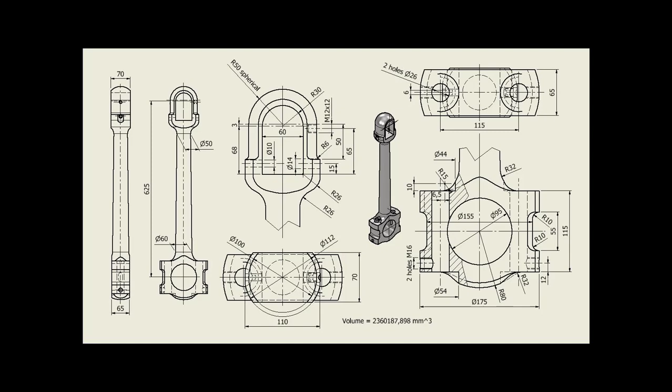Hi my friends, today we study and model this object, which is a crank. The distance between the two ends, the centers of the two ends, is 625 millimeters - this is why I called it crank 625. The drawing is here, and as you can see, the distance is 625.

There are some problems, but I want you to know that the source for this model is another drawing of Timoteo Carreras Soto, an engineer I told you about in the past - see my tutorials 182 and so on. This is our part with some other components here, and this is its drawing, the bottom and the top end.

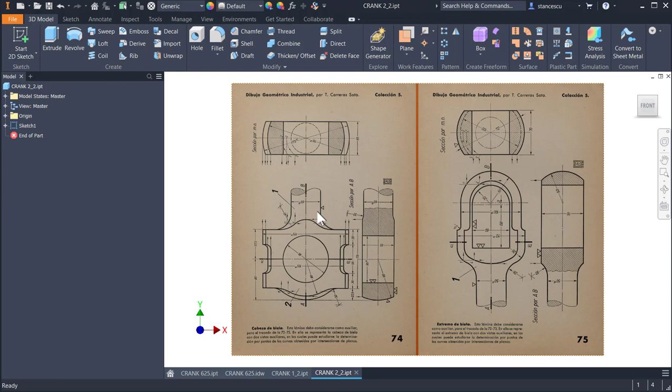There are some small errors here. As you can see, this is radius 80 and this is also radius 80, but this is corresponding with this arc, not with this one. So we admit that in 1955, when this engineer started with his drawings, it was another mentality, and we have to respect them.

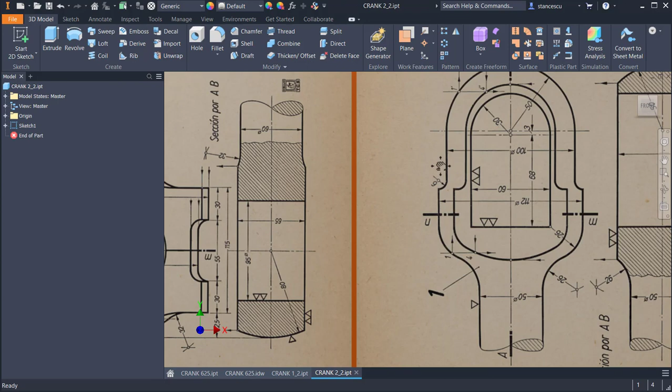There are also some other small mistakes. I converted this to the actual standards, so this is why I made this drawing, which has all it needs. You see, radius 80 is outside here, not here.

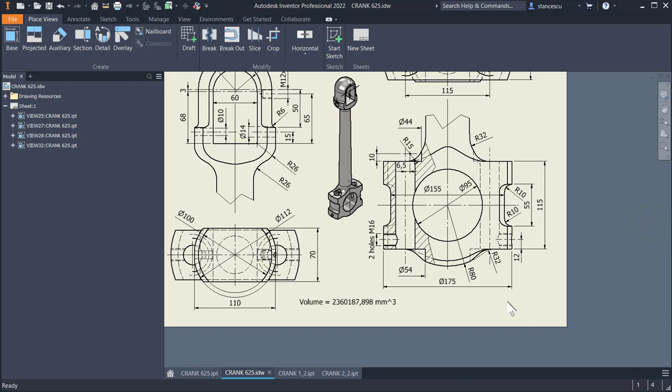Let's use this drawing to create our part. New file, standard millimeters IPT, and we draw a line as a center line from the center down 625, the length of the crank, as you can see.

Then we want to draw this external contour, which is a revolution contour, to create the top end, and we want to create this other part, end by using the proper dimensions.

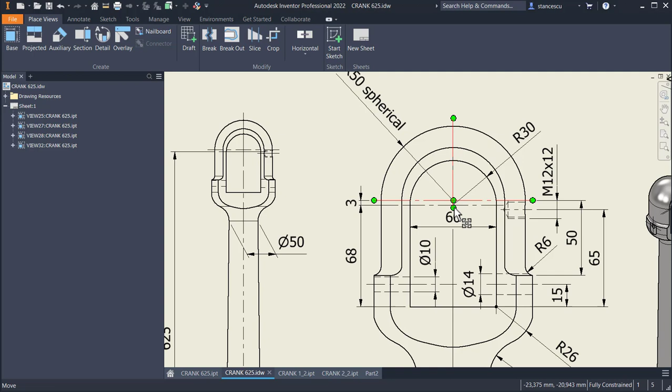You see here radius 50, the distance of 3 millimeters, very important between these 2 points. This is the center from where we measure the 625, the bottom, not up, but the external contour is from 3 millimeters up.

So let's start. New, millimeters, sketch. We apply center line as a default line, and we draw a vertical line from the center point to the bottom of 625 millimeters.

This is the center line of the part. We start with the half of the profile, going with a line, but not center line, to here, and then I keep pressed the left button of the mouse to go here.

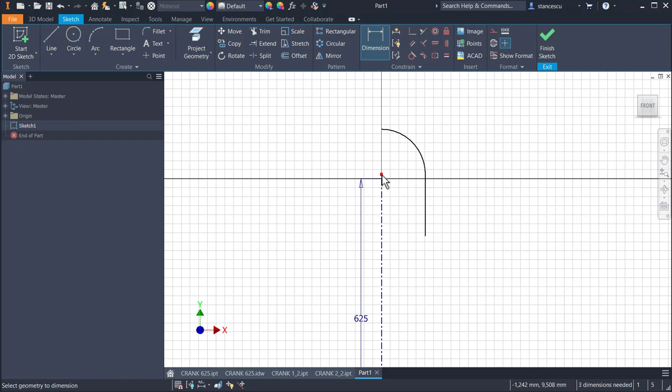Escape, the same vertical between this point and this end, and the same vertical between the center point and the center of the circle. We place here the dimension of 3, as I said, the radius of 50.

And then I move a point somewhere here, and I continue with the tool line to draw an arc. This is the construction, and we go somewhere down, and again 2 tangent arcs by keeping pressed the mouse cursor.

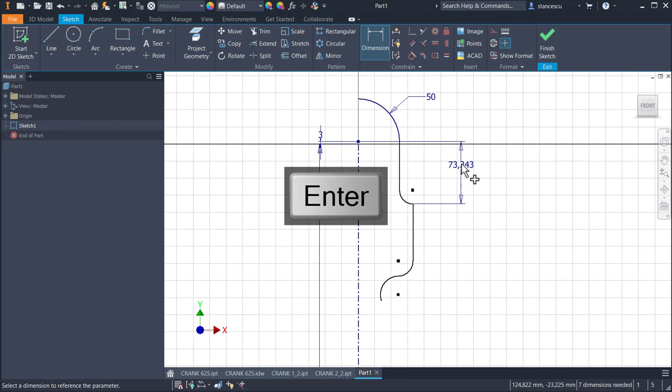Dimensions are 50 from this point to this point, 50. This is 6, a radius of 6, diameter of 112, 112, a radius of 26, and also 26.

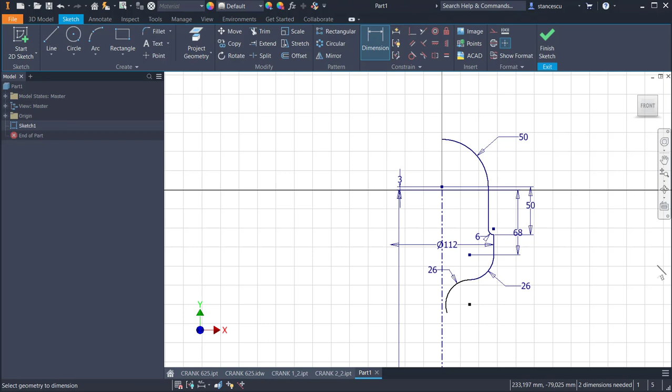Good. This point must be at 68 from the center point. This dimension is 68. Good. Now I go down

to draw the other end, and considering that this is the end of the vertical line of 625, and 115 is the distance between these two. So I start from here, I draw this radius 32, and then I go down with 32 and 80 with the center here at the end of that vertical line.

Let's start with the last thing I said, an arc with a center here and the radius of 80. We place this point on this vertical and we draw line arc. This is the line which is converted to an arc.

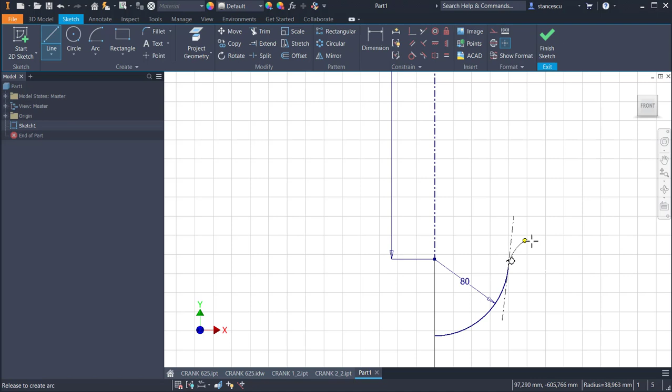We go to the right, up, arc, up, arc, left, and another arc. Escape. These two lines must be collinear. These segments are equal, these arcs are equal.

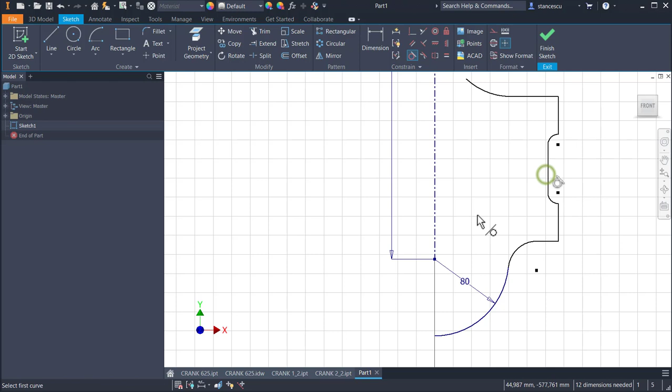I suppose this is not tangent. Yes, it was not tangent. And then I place 55, the distance between these 2 points. 55, 115,

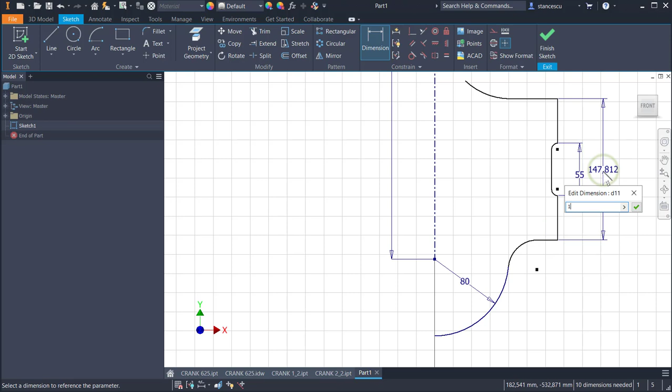15, radius of 32, and also 32 here, and I move this construction, but let me place another dimension here, 10, to keep it

stable. And I move this somewhere here, but this arc must be lower, lower, and since this point must be on the same horizontal with the midpoint here, I draw a line, construction line,

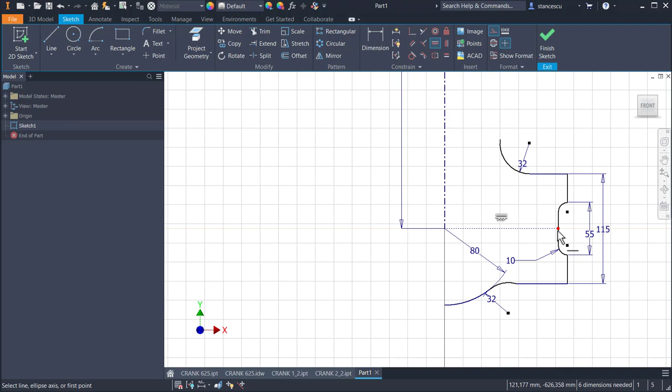between this point and this end, and then I make it horizontal, this line to be horizontal. Why? Because the dimension of 625 is from here. Good. Another important dimension is 60 here,

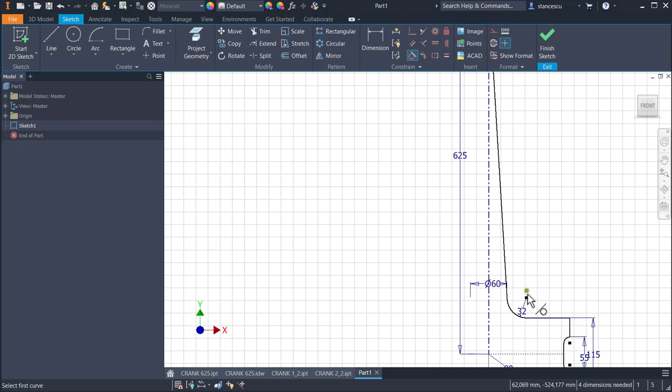and I draw a line between these two ends, not construction. I disable construction, I make this not construction, and I apply tangent between the line and the two arcs. Why? Because I want to place here the dimension of 50. You see? This is

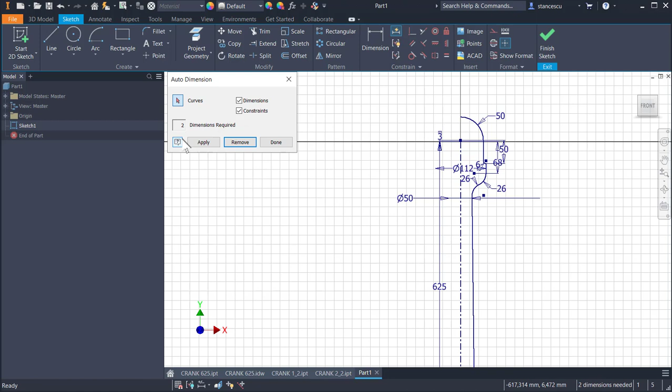roughly the sketch. We need to place other two dimensions. I suppose at least one of them is a tangency, but let's see with auto dimension. Apply. No, they are both dimensions, remove, apply. One is for this point.

Oh, I forgot the two dimensions, this diameter and this diameter. This is why. So this diameter is 175 and this diameter is 155, which really is, but I want to place that dimension now is

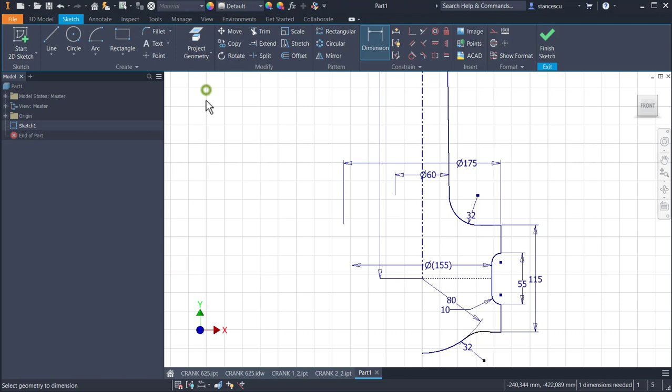accepted by changing the situation of these points. This point, this point, this is on this line, you see? This is in the air, no problem. But this is on this line, since we see the red line when I select this point.

So I click here and I apply delete. Now this point is not on this line. This point is not on this line. So I can convert this informal dimension to a real dimension.

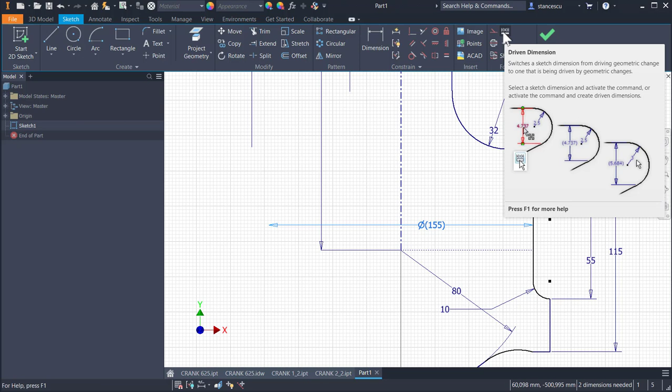How to do this? Anybody knows? Is anybody who knows what to do? If not, I'll show you. I change this setting. You see? This is for driven dimensions and I convert to not driven conversion dimension. And now it is real.

Very useful to know. And this is another dimension missing, but we see it here. Tangency. Tangency between these two. And now it is fully constrained. I try to extend the center line, but I receive an error message because of the dimensions. So I need to draw a new center line.

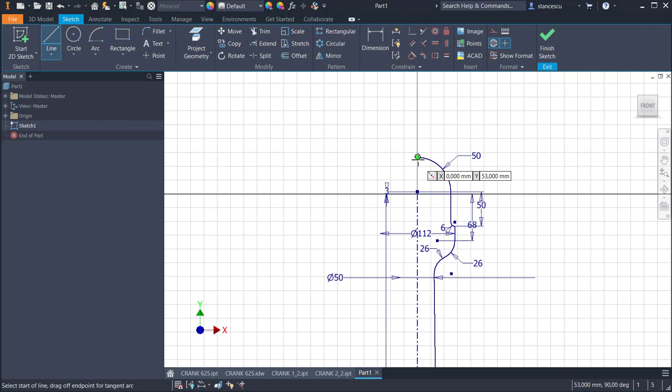I apply center line and I place it here. What happens up? The same thing. Finish sketch. Revolve.

Oh, this is missing. Let me draw another short line with the length of 3 millimeters. Center line, line from here to here. Good. Disable this, finish sketch,

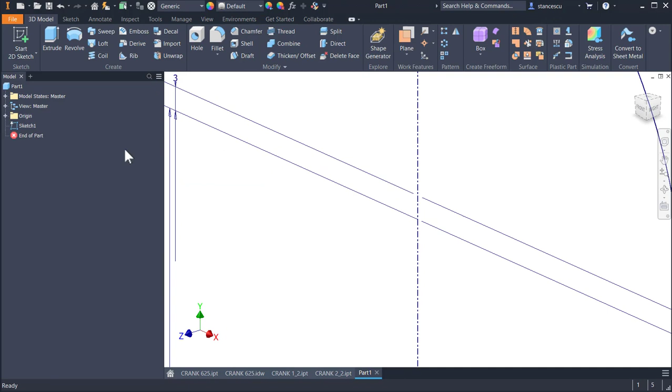and revolve. Now we have the volume by selecting the axis, because there are 1, 2, 3, 4 axes here. I have to select the one I want.

Okay, the material is steel carbon F6, and we have a starting point. Very interesting, my friends, very interesting.

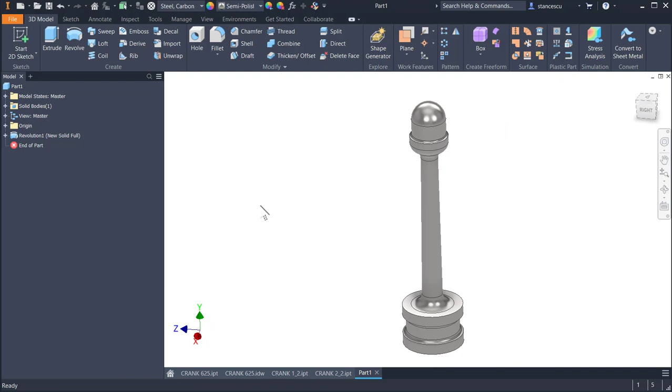Good. Now I want to apply cuts. As you can see here, there are two cuts. This face is one and this face is another one. The difference between them is 5 millimeters.

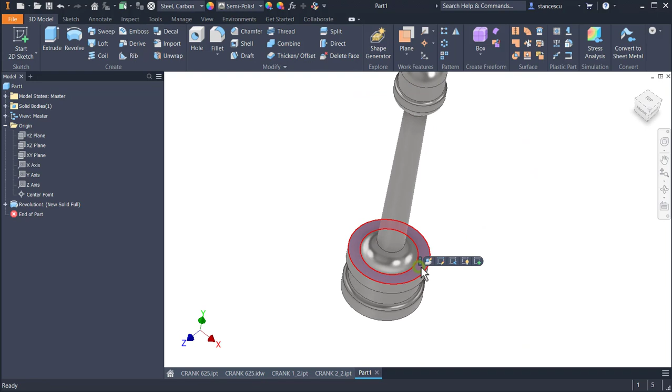So I create a plane, because I cannot use neither this plane, which is placed at the center point, yes, 3 millimeters from this circle down. I cannot use this plane because I have to go up and down. Oh, but this is okay.

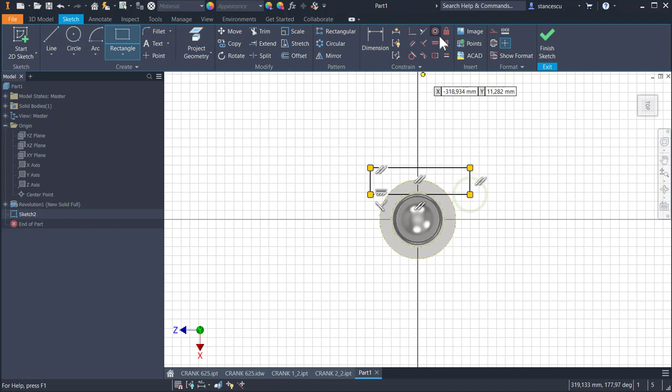Yes, let's create a sketch here. All of these are construction lines, and I draw a rectangle which must be tangent to the same circle on all these sides. Yes.

Now I can mirror. This is the only freedom line remaining. I can create a mirror of this sketch, but I don't like mirroring sketches. I don't like. So F7 to see inside.

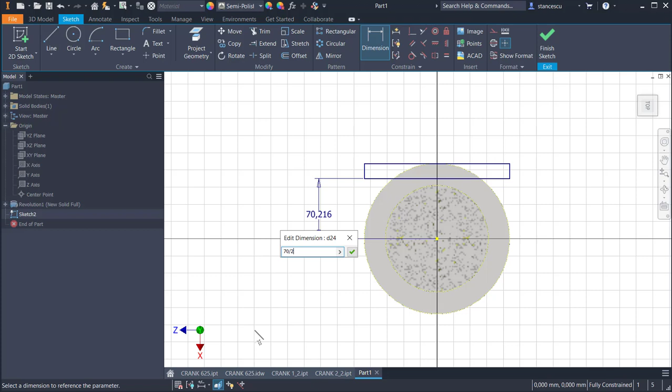I apply the dimension of 70 divided by 2. Divided by 2. Okay, and now we have the profile to apply for cutting all the part from bottom to up.

Extrude, the only closed contour is this one. We select this and through all, but cutting. You see, we have here the feature.

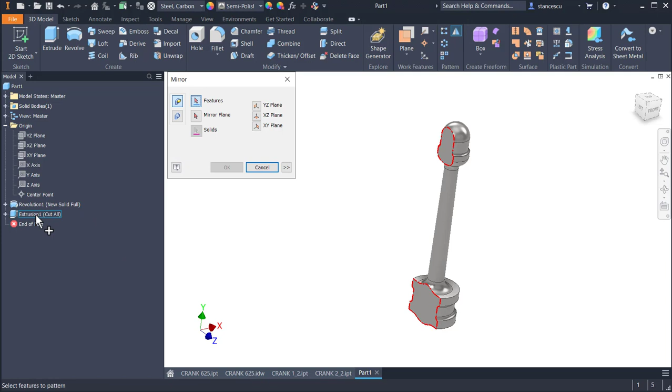Okay, and then we apply mirror of this last feature, extrusion, about the XY, not XY, but YZ plane, and we see again the feature.

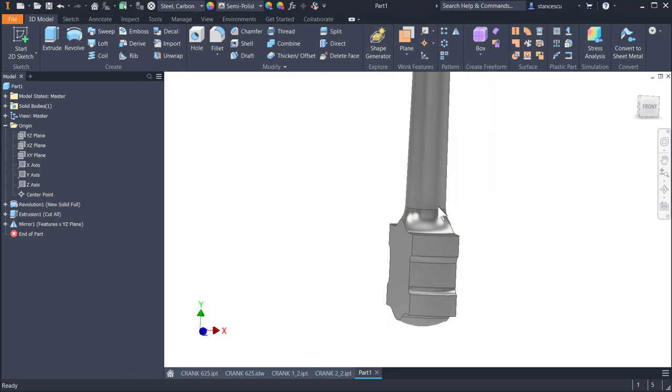Okay, now I want to make this not 70 but 65. This is a problem. I don't want to place dimensions, you see, because when you change some dimension, a cut can be not entirely good.

So I make something. I create a plane parallel with that plane and tangent to this sphere. Yes, parallel with the plane of this plane, and I create here a sketch.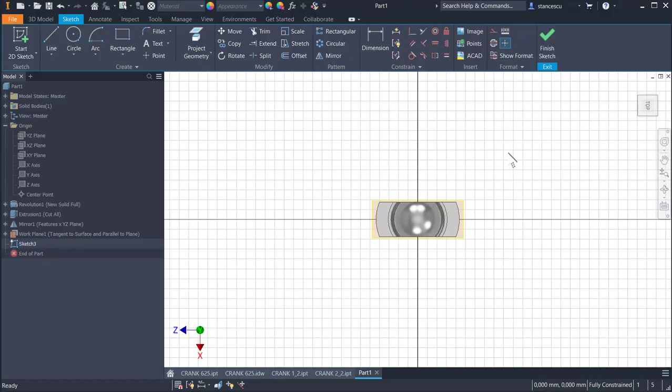But I want to see it from the bottom. Now I see from the bottom.

I draw a rectangle, but first let me project some geometry here. This arc and this arc, which can be construction lines. Okay, rectangle. This is the rectangle. It must have this line collinear with one of them, and tangent on the two sides with the projected arcs.

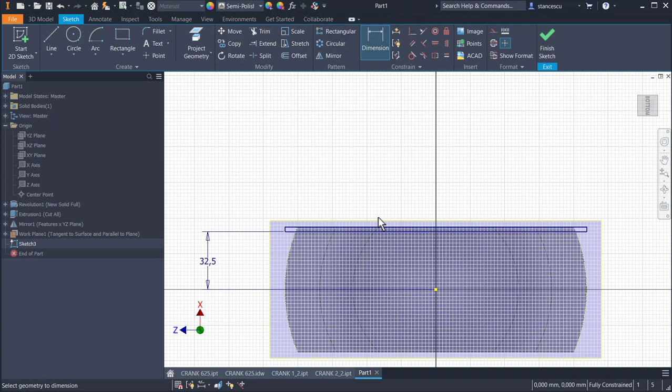Now I place a dimension from a side to here of 65 divided by 2. Okay, and this is 32.5 millimeters. I use only dimensions in the drawing. I don't write 32.5 here because I can make a mistake.

Finish sketch, extrude, cut the other direction, and now I have to place a dimension.

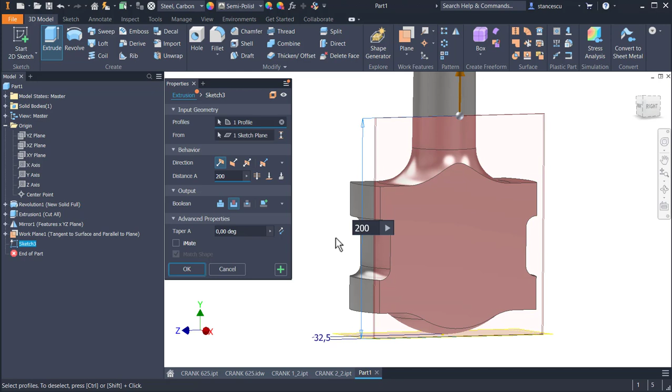Even if I don't want to, I have to place a dimension. I know that this is 115, so 200 is very generous, so I place here 200. If somebody changes the part, I don't suppose this great difference. If I have doubts, I place 300, no problem, because the 600 here is covering everything.

Okay, then I make this not visible. I apply mirror for the last feature about the plane, this plane. Yes. Okay, F6.

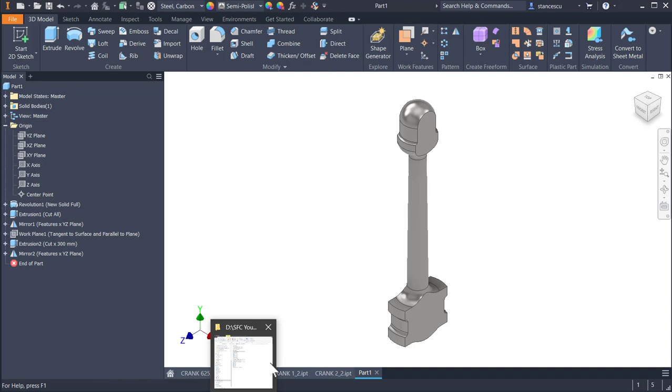Now I go to the drawing and analyze this cut: 60, radius 30, and the distance of 68 millimeters from the center point. This is the center point, not from this point. 68 with radius 30. Let's make this cut.

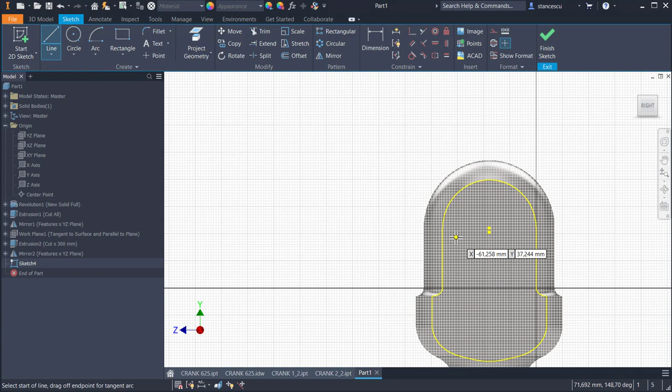I select a plane, I draw some lines. If you want to know which one is the center point, go to the center point and without any click you see which one is the center point. I draw some lines, as I said: 1, 2, 3, and I close with an arc. Nothing simpler than this. Now I place the center of this arc in the center point.

Oh! I place this point in the center point. Yes, I cannot make a mistake.

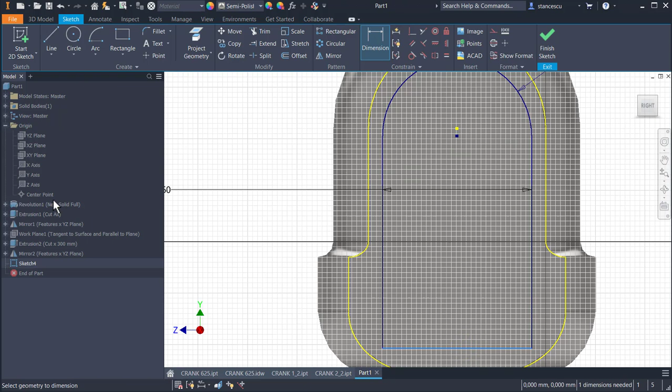Now radius 30, and the distance of 68 from this face to the center point. 68. Very good.

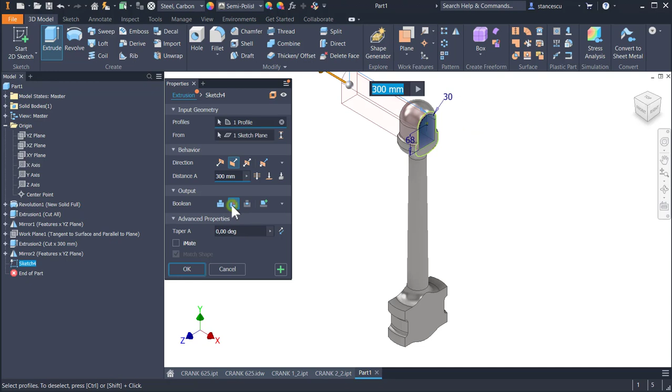Finish sketch, extrude. This is to be extruded, but with cut all the way, not a dimension, but all the way. You see the cut.

Here is a hole, a big hole of 95 millimeters. Look here, 95. Let's create this. What is your intention?

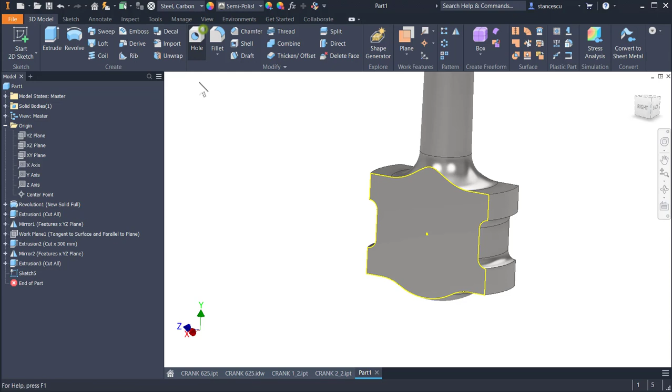My intention is very simple. I select this, I select a sketch, I go back, and I have a point. This is the center. Hole, not threaded, not other, through the part with a diameter of 95 in this point. This is the point you need to select. If here is a point, a cross point, it is not necessary to be selected. I select it and we have the big hole here.

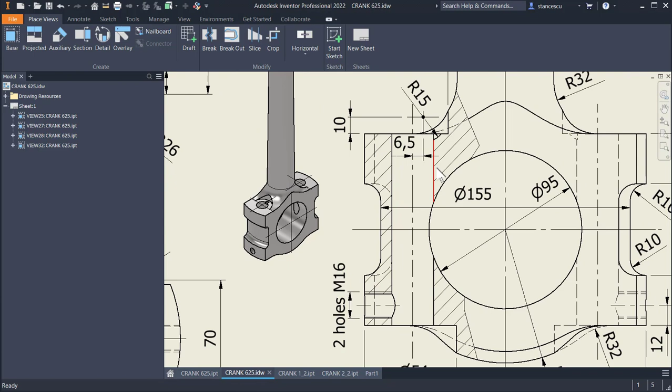Now I intend to create this hole, two holes, with a diameter of 26, but I see that there are counter bores at both ends. I cannot use the hole tool to create a hole with two counter bores.

So I make a revolution profile here. Look at the dimensions: diameter of 44, 54, 26, and ends are on this 115 lines. The distance between the holes is 115, like here.

Okay, I use the plane, this plane. I go here, then F7.

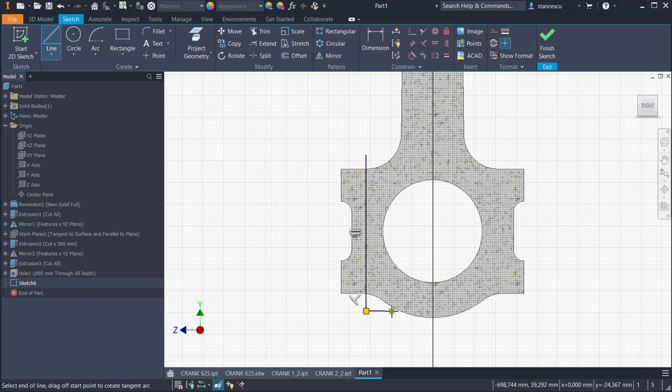I draw a line which will be the center line. Then other lines, not important to be exact. I go here, click and close.

Very interesting. Then I place the most important dimension between this and the center point, which is 115 divided by 2.

This is 26, but let me make this a center line. Dimension of 26, dimension of 44, and 55 at the bottom.

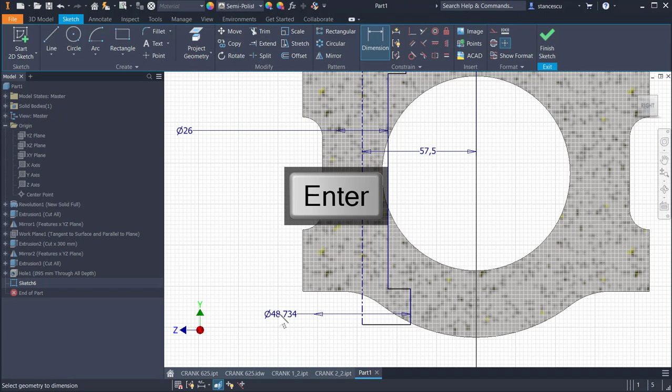54, not 55. Good. I try to make collinear this line with this, it works, and this the same. I create a point here, and I project this arc. Why? To place this point on this, on the same horizontal, this point with this point. I suppose this is not horizontal.

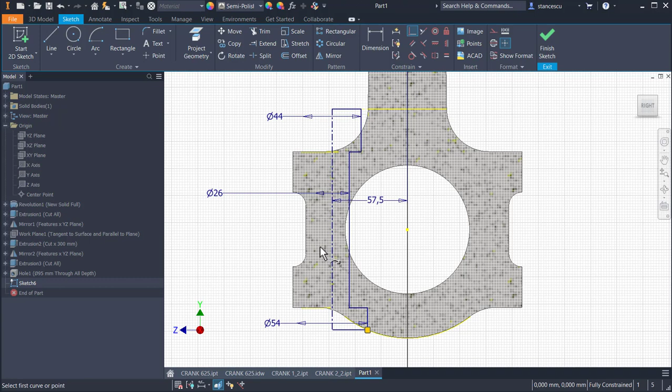Let me see. I make collinear these two and it is the same. It was not used, the point. And here I place the point on the arc. Yes, I don't create dimensions as much as I can to avoid placing dimensions arbitrarily. Fully constrained. Finish sketch, revolve. With cut, of course. Okay, what do we have here? We have what we wanted to have.

Good. Now is a good moment to create a small cut here. As you can see, in the original drawing, this screw has a nose here, and the nose is placed in a cut of the crank. I have no dimensions for these two. Not here, not in the drawing, I don't have. So I created dimensions for this cut. Radius 15, distance of 6.5 of the center from the center line, and 10 for here. Keep in your mind 10, 6.5 and radius 15.

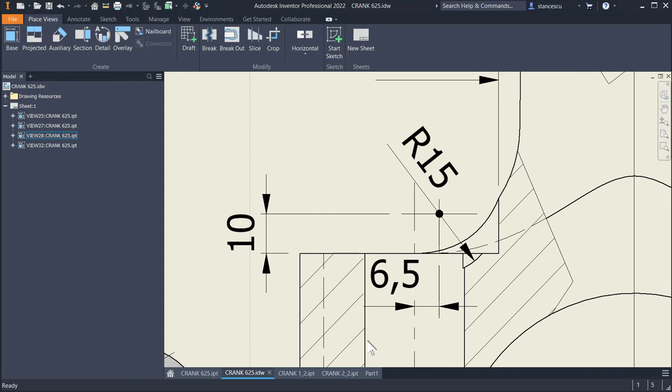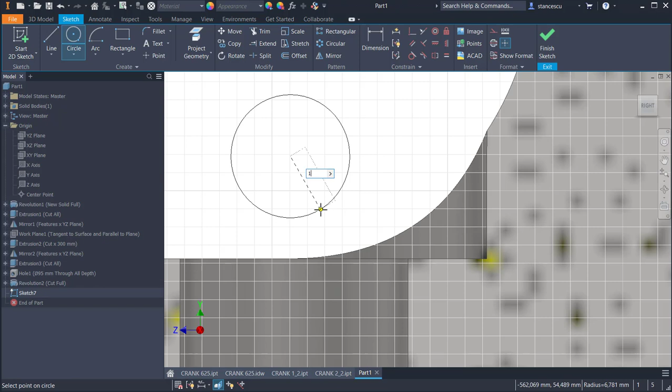I create this cut. I use the same plane like before, this plane, to create a sketch. F7, home, and we work here. What do we work? We create a circle. You see the radius is selected since I don't have this checked option. If I check it, I draw a circle with a diameter. If I check radius, I can place here the value of 15, because I have radius 15, not a diameter of 30. Then a dimension of 10 from this circle, not necessarily to select the center. I select the circle and this line, 10.

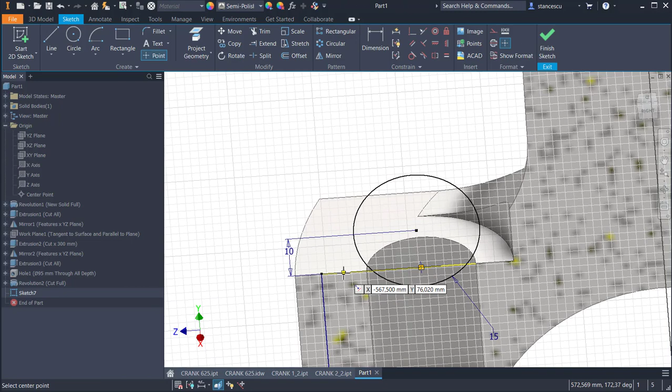Now I need to use the center of this, the center of the hole. So I project this circle and I have the center. I place a point here. It is in the center. The other line has its center somewhere. There is another line here. Maybe this one, I don't know. But this is our center. Escape. I move this to the right and I place the dimension of 6.5 between the point and the center of the circle. 6.5.

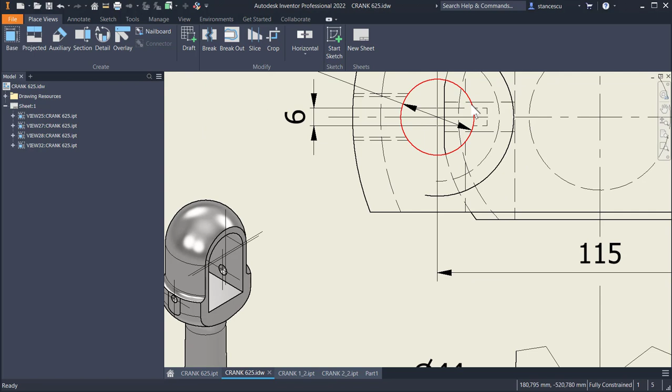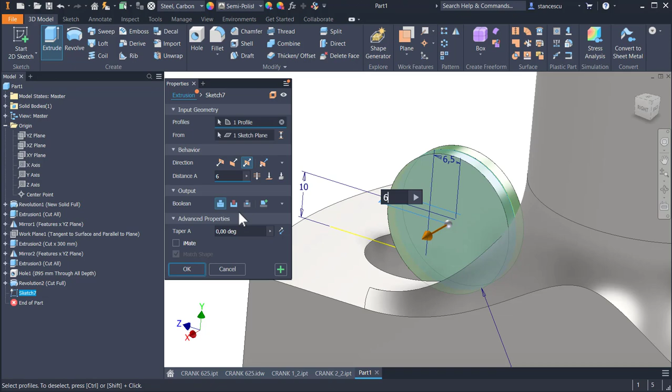Okay, now let's see what is the width. We have the width here. I didn't find any other place where to put this dimension. The value is 6, and the cut is here. Good. Finish sketch. Extrude. Symmetrical of 6. And not adding or joining a new feature, but cutting the part with the new feature. OK, F6.

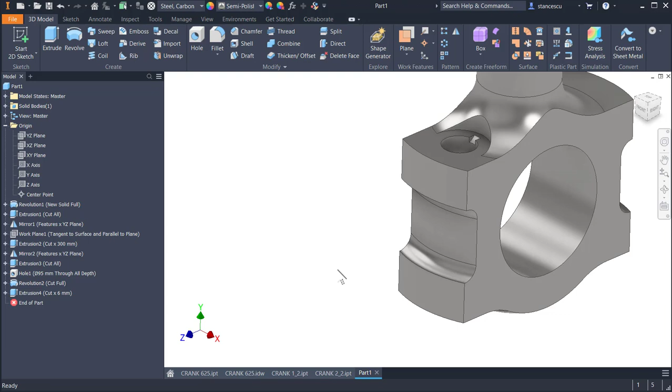Now, if you look to the drawing, you see 2 holes here. 1, 2. Metric 16 placed at 12 millimeters from the bottom, bottom face, plane face. Okay, to do this I need to have an axis and a point. One of the possibilities to create a hole. Look here, I create an axis, but I don't have a line somewhere to select that line as an axis. So I create a plane starting from here at minus 12, OK, and then I select the plane we already used, this plane, and as you can see, an axis was created.

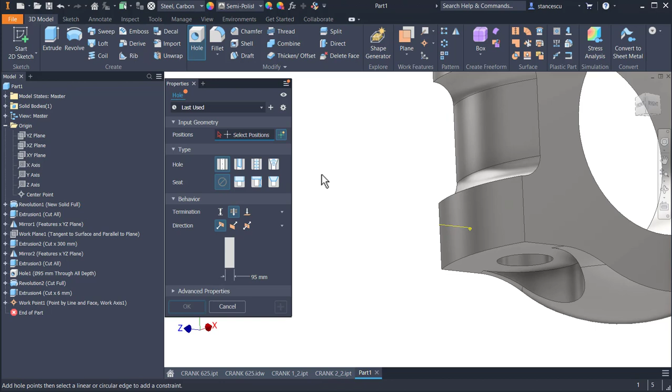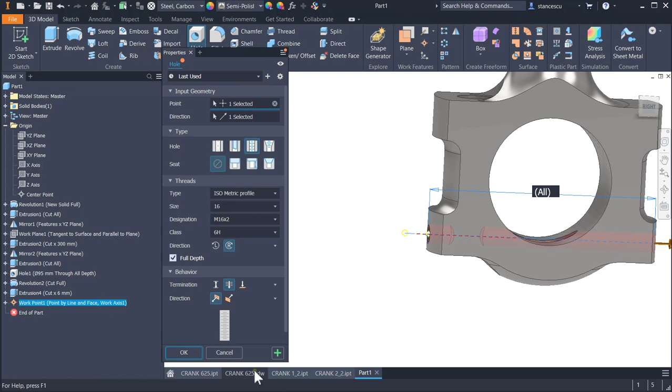Now I place a point. Without a point I cannot apply the hole tool, and we have this point of start. Hole. I select the point, I select the axis, I am sure that this is the hole, and now I select a threaded hole and I use ISO metric profile with a diameter of 16. Now is good, but the hole is not through the part. Let's see how long is that hole. Oh, it goes to the hole here. Good.

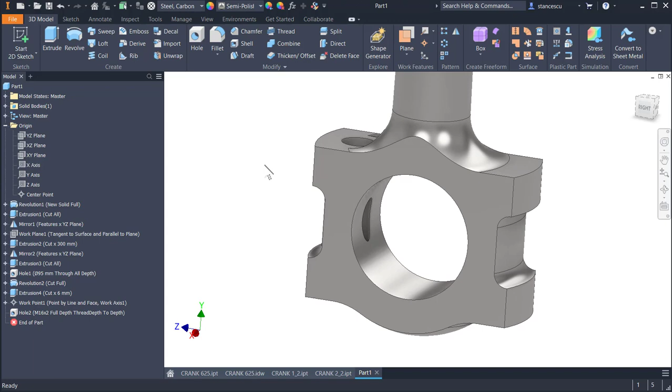I go back to the part and I apply 2 and I select this hole. You see, everything is OK. Now I make not visible the point and the axis. I don't want to have ghosts here. Now the hole with its definition, the cut with its definition, and the hole, all 3 of them, must be mirrored to the other face. I apply mirror, I select the last 3 features. You see they are selected, and a mirror plane, which is our nice YZ plane. And you see the future of the part is this. Very good.

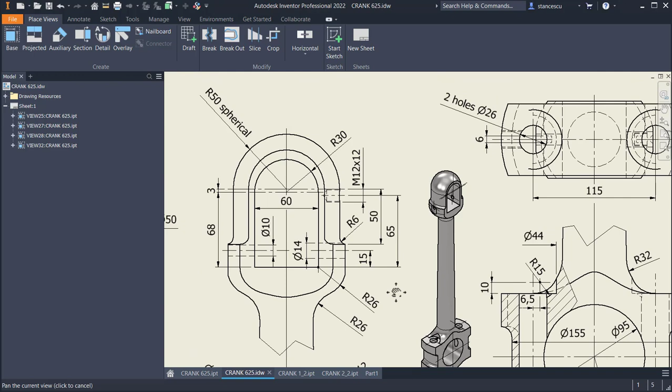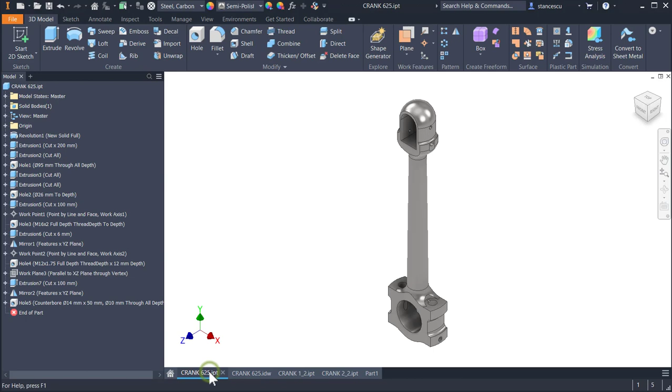Now we go up and we see that there are some machinings here. We have to create a small flat face to place a hole with two diameters, 14 and 10, at a distance of 15 from the bottom of this. But first, let's create the faces. There are two faces. Look at the model. You see, this is a face and this is the other one.

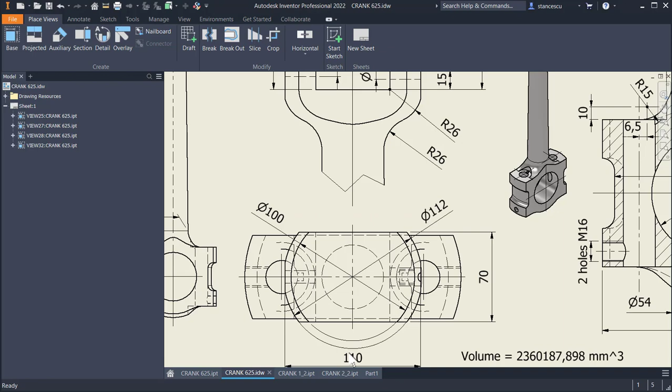What is the dimension? The dimension is 110. You see, the diameter here is 112 and the dimension is 110, so this is 1 millimeter between this line and this arc. But we don't consider 1 millimeter. We use 110.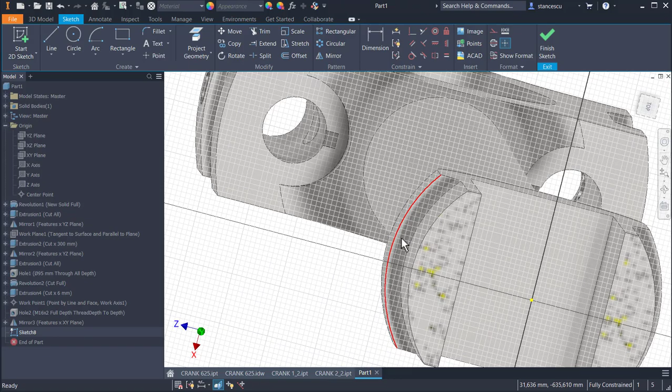You know the system, our system. The system is to use this plane, yes, for a sketch, and F7 to see inside. We have to cut this, not this, but we project this arc and we draw a rectangle. The system, we use our system.

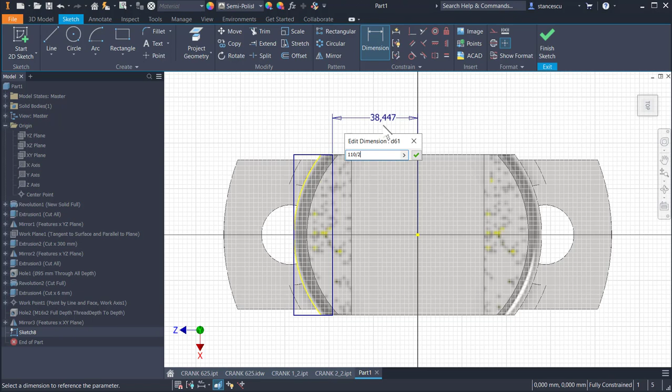Tangency between these two, and coincident this end with the line, coincident this end with the line, and now the dimension is 110 divided by 2 for this cut of 1 millimeter. Finish sketch, extrude, cut.

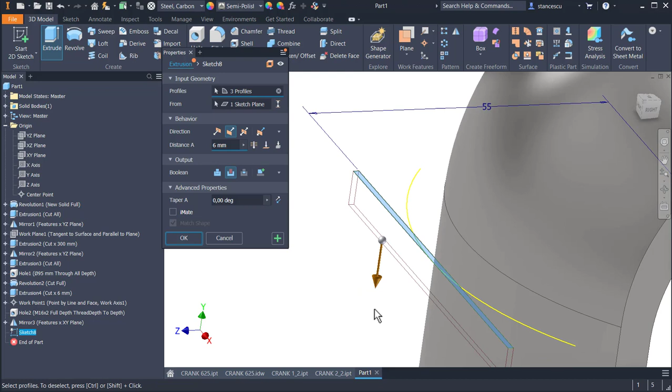We select this because there are also possible other selections. You see here, I didn't make this construction line, so I have to select. And now a large distance as before to create this. 92, no, 200. Okay.

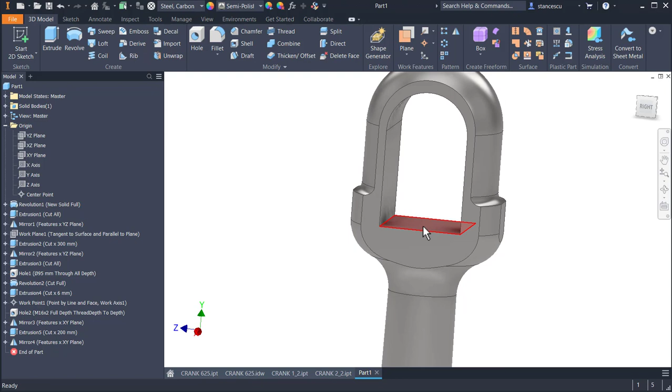The last feature, select mirror plane and select the plane you want. This, and we have a suggestion here. Now I make that hole with 14 here and 10 here at a distance of 15 from this face. To do this, I create a circle. This is the larger and this is the smaller diameter.

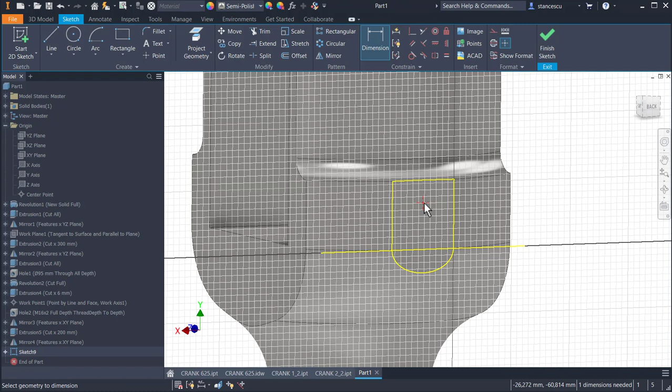A point somewhere, but on the same vertical with the center point, and I project this face to have a line. It doesn't matter if these lines and entities are construction or not, because we only use this point. The distance of 15 from the point to the line, 15. Finish sketch, hole.

The hole is placed here, and the kind of hole is with counter bore, through. The major diameter is 14, the minor diameter is 10, and the point where this is placed is 2.

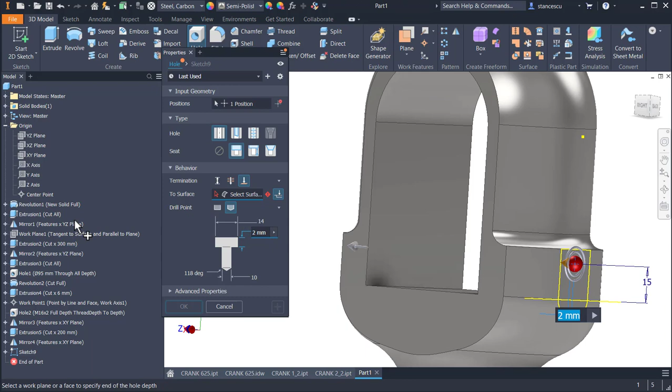Now, this point, and I select the XY plane, yes, but this is for the end, not for the counter bore, so I don't like it. The hole is through, and this dimension is half of 110. So I write here 110 divided by 2, and you see this is the end of the larger hole. Okay, this is larger, it cuts a little here, and this is the smaller one.

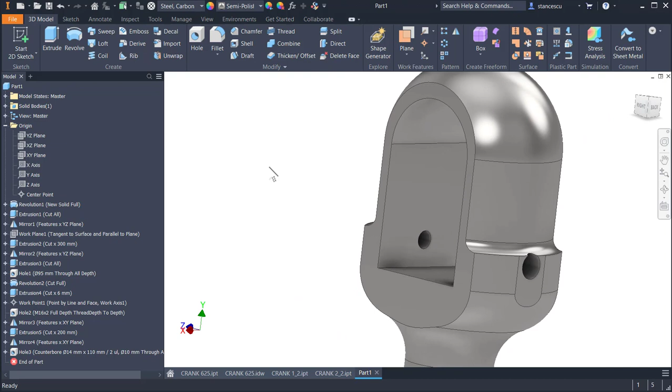F6. The last feature is this M16 with a depth of 12, placed at 65 millimeters from the bottom of the cut. Only on this face, not here. Why to have this? Because as you can see there is something on this end. This is the hole which keeps the screw from being rotated.

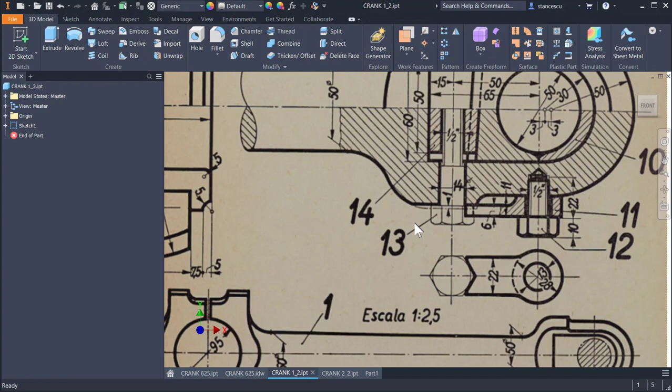Good. To place the hole here, we use the known procedure. We create an axis by creating a plane which is placed at 65 up, and this plane to be intersected with this plane, and we have the hole here. We place a point on this face, on this axis, and we have the start for the hole.

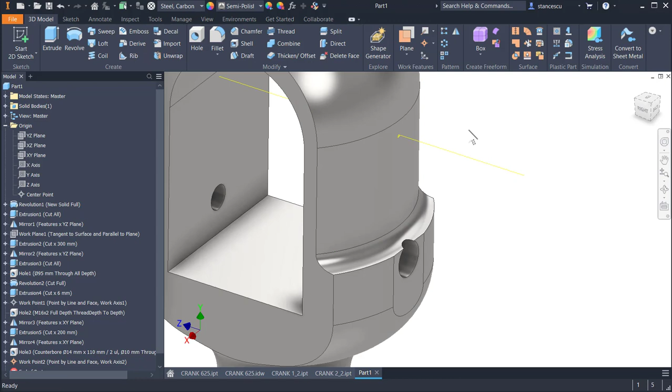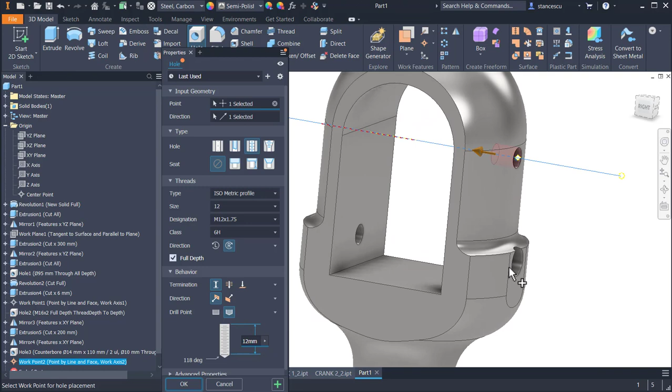Hole is tapped with a diameter, not counter bore but cylindrical. The distance is 12. Triple click, 1, 2, 3, 1, 2, 3. This is 12, the depth, and the diameter is ISO of 12 as well, in this point and with this axis. See. Something is not okay. 12 here. The depth. Okay.

I make this not visible. I don't want ghosts in my drawings and models. F6, and this is the part, my friends. Let's see what happens with the volume. Is it this part? Properties, physical, update. As you can see, here is a dimension, but it has a range of error of 0.7%. So this is not exact.

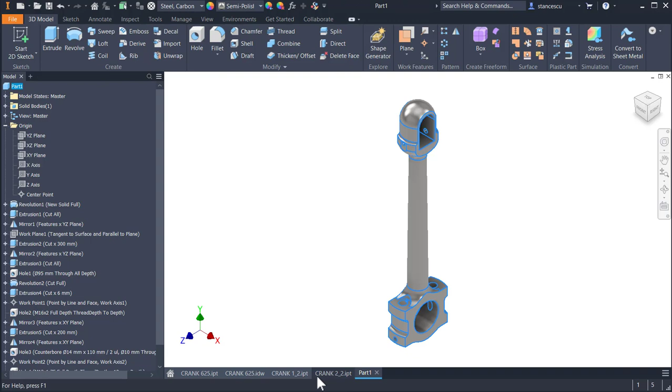We have to see how different it is from our creation. This is the new value, which is slightly different from the value there. So I place the new value because I want you to have the procedure I used to create this model. If you use another procedure, you find differences, small differences.

One of you, my friends, asked me the other days about this, and my answer was, this is not a fixed or precise value. It is calculated, and it has a range of error. This is the part.